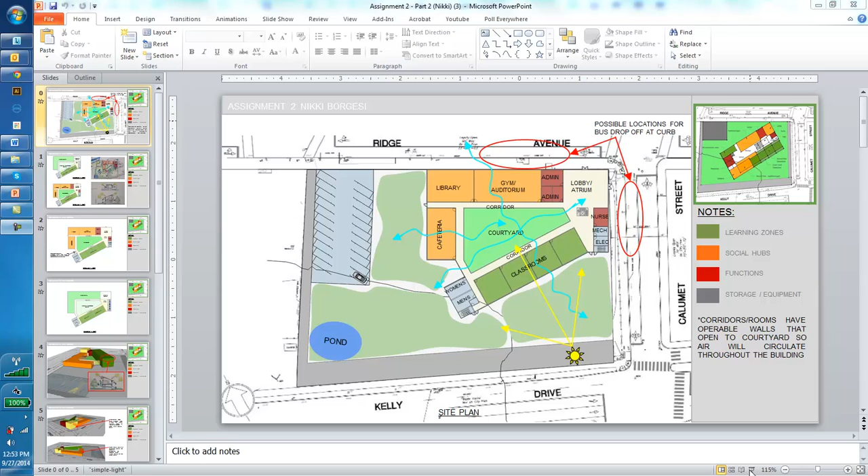A couple things that I thought were really interesting about what you did for this week: number one is the way that you took this very pragmatic scheme that was meant to be that way, and now you've evolved it into something using the four perspectives, into something that has a lot of potential, I believe.

A couple things that you want to think about here, starting with the parking. I think you want to look at something a little more squarish, something that could actually allow for traffic to flow. So what ends up happening is you get spots that go like this, spots that go like that, and then spots that go like this. And then you have a turn in here, and a come out there.

So you might have a little island there, maybe not, maybe. You could come in, park, back out, and when you go out, you leave that way. You could even leave that way, because that's a two-way street. But the entry and exit are pretty separate, and I think that's critical for a morning flow.

That goes also with the bus drop-off, which is going to be right here. You're going to have to take a lane out of the sidewalk. So what's going to happen there is you're going to have a situation where you're going to have to move the building back a bit.

Same thing over here when you have the car drop off, and I would be generous with that. It could be pretty long, but you're going to have to extend the sidewalk down around that. What that means is your building now is going to get pushed back to about there. That'll be the boundaries of your building, unless you can figure out some other drop-off pickup scenario.

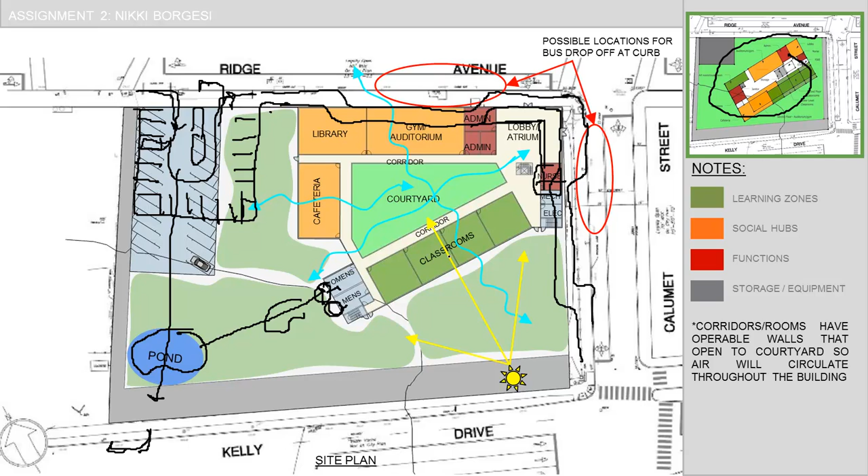You're probably going to need another set of bathrooms up front, and so we can talk more about that when I get to the floor plans. But the idea that you could be collecting rainwater and somehow celebrating that, creating a line of habitat or natural elements through here—not like a park, but really more like a habitat—could be very interesting as an architectural gesture, a landscape architectural gesture.

And something in here could be happening where that line is kind of connected all the way through as an element. That would be pretty good.

You also have a nice condition where your breezes are coming in this way, so that will help with the courtyard. The classrooms are really not going to benefit from breezes in their current location or orientation, but that's okay because you're really looking for solar in this particular case.

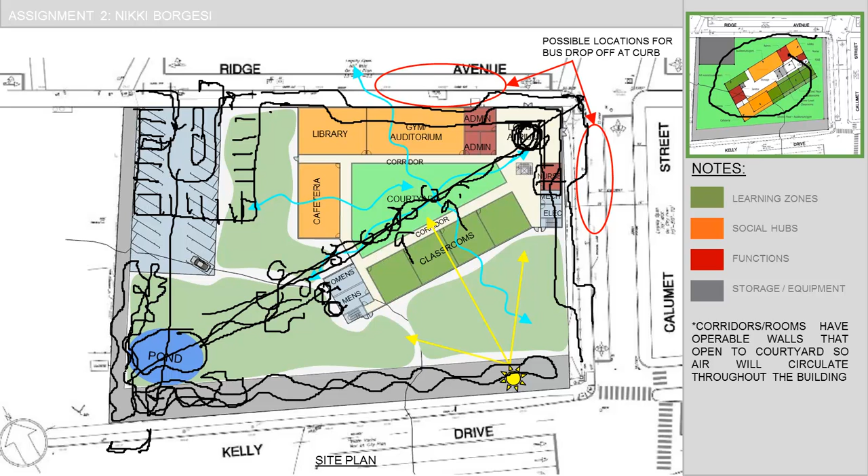Also, I know that you have a whole berm action going here. Don't be afraid to put that in graphically because it really helps you understand how the site is going to feel. I would get this to be really solidly planted all around here so you get a sense of wilderness as it gets more toward the edge.

Now, looking at the building, I'm not going to use these plans, I'm going to go on with that. I just wanted to give you a check mark on the sketches here. It looks like there's a lot of thinking going on—oh look, and there's your parking is that way. So I would go back and look at that again.

Just in terms of air movement, your classrooms—whenever you want to get air movement, you want to bring it in low and wide, and you want to go out very, very high and very small. So whenever you draw these arrows, try to think about them more like that. And of course, the more cross ventilation you can get, the better. We know that. Nice sketches, though.

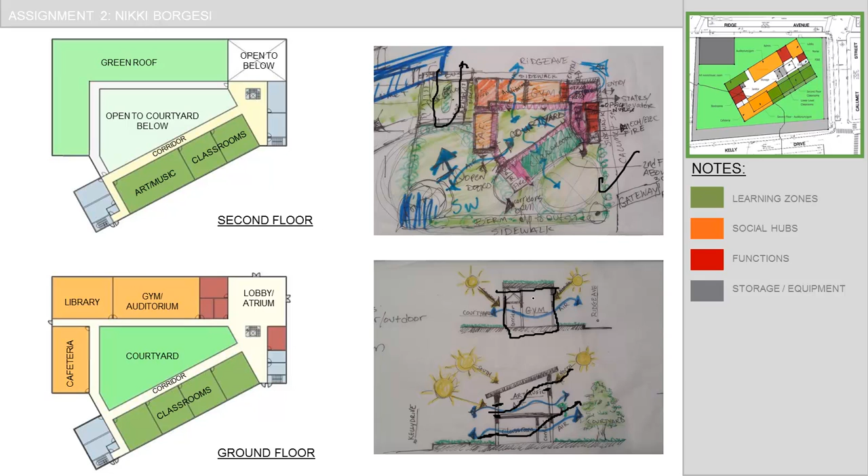Thank you. And by the way, take note that your gym actually has a very high ceiling, so in some of your 3D models, you don't reflect that very clearly.

Now, as I said before, we're going to push the building back this way and this way. So one of the things you're going to want to work on is a way to get a really nice set of vestibules here. Maybe this is wider because a lot of people are going to be coming from that direction, so maybe there's a set of vestibules that does that, and maybe it comes in like that. So you definitely want to think about how your air buffers are created.

You want to think, as we get into the interiors of the project, how the reception desk is going to be working. I would consider moving the nurse into this grouping of buildings, and I would consider another set of restrooms. And maybe they flip with this because we're going to have to get an elevator in.

I think the elevator wants to move there. Right now you've just got an object of a stair floating there, and I don't know if that's really going to be the thing that can help you. Whoopsie, darn, didn't mean to do that.

This stair could be a really wonderful thing if you start to think about it as part of a double height space. It could have a great presence in this double height space and really help to activate that space in a really meaningful way. And this part's double height, if I remember, so that's going to be very helpful.

Your corridors are a little unforgiving. Typically, we might bunch doorways and create areas where it gets a little wider. And what can happen is those can be seating areas for the wintertime, and then in the summer maybe all of this opens up and becomes an extension of the outdoor space.

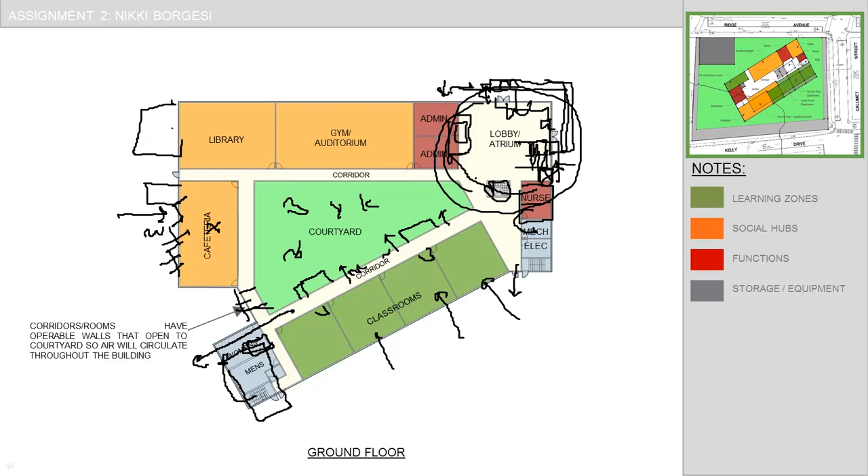On the second floor, I'm really liking this idea of the green roof. I think this is very much a living green roof where you're going to be growing a lot of vegetables and raising chickens, perhaps. And what that's going to require is a series of storage sheds or little functional utility buildings that store tools and other materials. I'm going to dash this line in here to represent the possibility of those sheds holding up another roof, and I'll explain what I think that's for.

Not quite sure what this balcony is—it looks like you're letting people walk inside and then looking out onto the green roof. Not sure if that's really needed. You could probably just have a set of doors right away that lets you right out onto the roof, so this would all be one continuous roof. But this would be the walking area, and probably be made of gravel or something else.

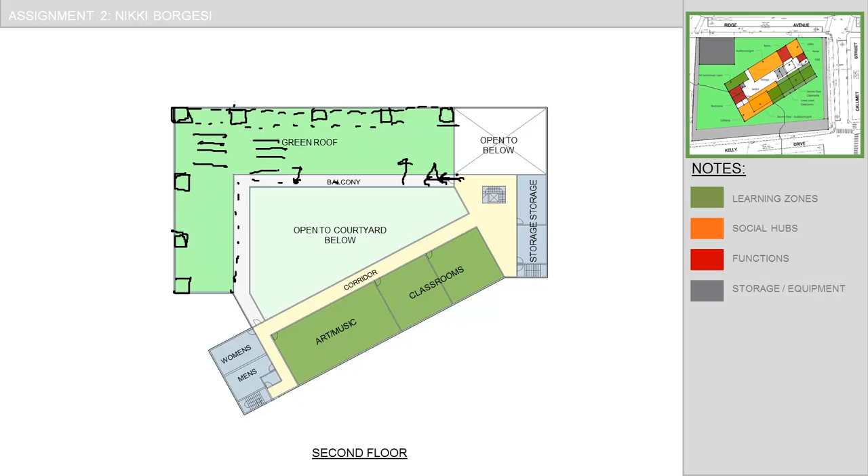And this gets in, if we're going to be growing a lot of food here—here's my representation of food—and then maybe this is a chicken coop up here. Who knows? But you're going to want to get that food downstairs, and maybe the kids are going to eat this food, so you do need some sort of vertical circulation that's not really this or the stair that I'm proposing for here or this stair. You need probably another stair that comes down at that point, but it's good that you have this one here.

So from the roof, this would be a door, right? So this egress thing is a little bit messed up. If this stair moves over to here, what'll happen is you can get an egress stair from the roof, and you can have one there, and you have a doorway here. So you do have some egress problems that we'd have to work out, but for right now, at this level, I don't think we have to panic about something like that.

So a lot of good things there. The art-music combo, I don't think that's going to work. I would put the music at the end with a nice sound attenuating wall, and also because your music's on the second floor, you're going to need to think about acoustics and how you create that acoustic separation on the first floor because there's a classroom below there.

Art seems like it could make sense there. You might want to have more glass coming from the north than on the south, or you may want to move the art room into another area.

This is gone now, so this is kind of a nice open area, and people can stand there and look out. Again, same thing with the doorways and collecting around the doorways. Maybe you want to have some places for people to sit and or congregate in the hallway, or maybe not. It's your project.

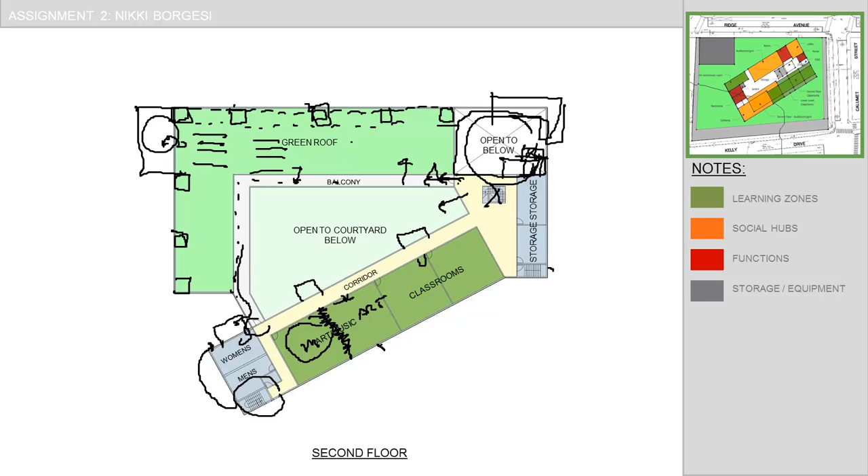And I think that this double height space has a lot of potential. Now, we talked about the fact that there's going to be some sort of vestibule in there that you'll need to consider, but having a stair that is actively a part of that double height space can be really good. And so I think you need to think about that.

I'm going to talk about some lighting of that when I go to the next slide. A couple things here. I kind of finally understand why you're sloping your roof this way for solar. That makes perfect sense. You're probably going to need solar on here. You don't have to have a sloped roof to do solar. This has to be a lot higher because this is going to be your double height gym space. This one does not have to be a lot higher. So you want to think about that, or even if that's there or not.

I like the transparency that you're using here. I think you should also do transparency along here to reflect the circulation path. But remember, this is facing due north. So the amount of glass that you want to have facing north is questionable, given the fact that our jet stream has shifted and now heating all of a sudden is becoming very important.

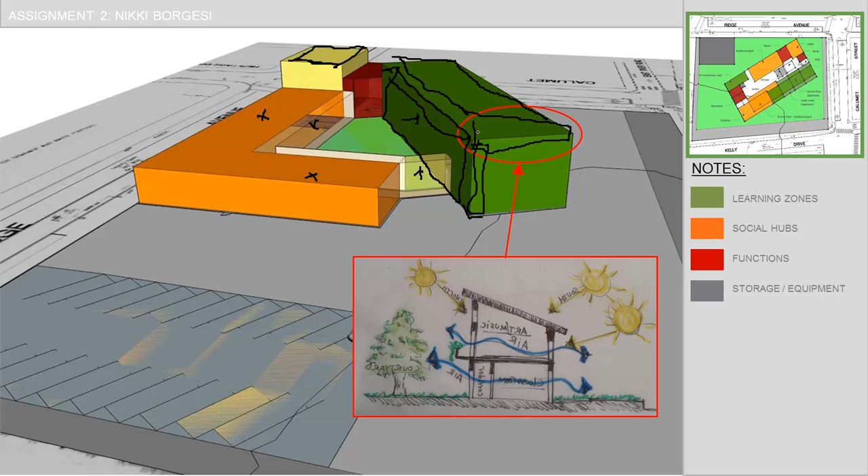And we talked about the rainwater element that kind of moves through here. It could move all the way down through the site. And then at the bottom here, there could be this pond, or the pond moves over here because you've got some bathrooms at this end that need to be fed water. So that all seems pretty reasonable. And we talked about the parking already.

On this one, what I wanted to talk about was this double height space atrium, and I would again think about having a solid roof with solar, and then think about a row of glass on 4 sides. This would be a clerestory situation, so this will be all glass, right? So what will happen? This will be like a beacon.

And then you'll have some glass, obviously, on the ground floor. I'm always nervous when things are 100% glass, and this could be some sort of vestibule action here that you'll have to design. But somehow thinking about how to get a lot of light into there without a lot of heat gain and a lot of glare really is your challenge there.

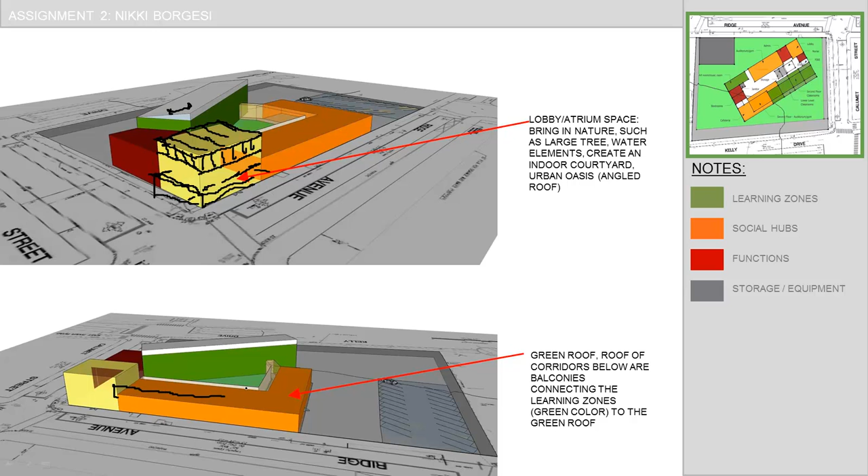And here you did build a roof, which looks pretty good. Again, you don't have to slope the roof for solar. The solar can come, you can mount them on angles if needed. So I think again, and then we talked about this roof's going to be higher, as we talked about, so I'm not sure how that's going to work out, but overall I think that you've done some good work, and your graphics are extremely clear. For me, it makes it very easy for me.

Oh, that's what I wanted to talk about. So for me, that makes it very clear. Now, what I think those little storage sheds can be useful is they can be architectural elements that create an urban edge along Ridge, and maybe there's an edge here along the outdoors here.

And what I'm going to do is I'm proposing that you build a trellis across here that will help to define the edge of the building and create a relationship with the city, but then think about solar panels being mounted there. I don't think you have enough roof space for solar right now to get to net zero energy. I think you're going to have to consider roofing the parking and putting solar panels on the roof there.

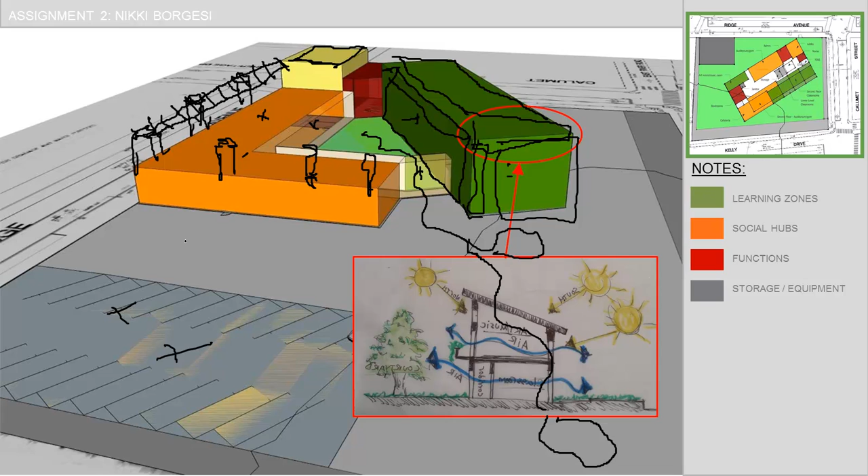So again, check back with your goals and your benchmarks and your guiding principles. But I think that this scheme has a lot of potential to become a nice building. Could be a really good building depending on how you develop it and how much time you put into it. But I think it's coming along quite well. All right, thank you.